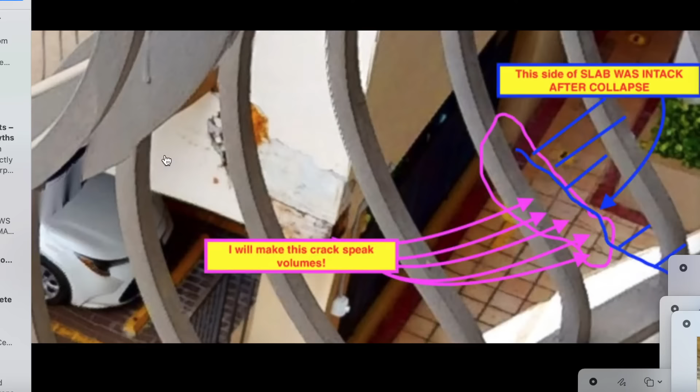So here's my cantilever here also. But this is that box, the planter box. There's the hallway. There's roughly the column. There's the vehicles below. That's the wall system. And right here is that crack.

And after I posted this crack, NIST put out a notification asking everyone to please send in images. You don't know what you have. You might have something in the background. So that was interesting. So NIST is monitoring the channel.

But hopefully they won't get stuck on stupid with the narrative that they must come up with global warming, sea level rise, because the government wants that. It's just a matter of integrity, and these people lack integrity if they just do something like that.

Here's the crack, right? This crack was indicating that there's a deflection over here. So back to my column that I point at in the video I just released. I'll link it below. In the last one, I show you the sagging, the load stresses around the one column there. But now I'm profiling it for you, working my way into showing you how you need to profile the entire cracked up system, including the core samples.

Remember, there's a core sample over here that's fractured. Here's the car, so it's right next to a car, right about there, below, at the deck area. And then right here on the deck is this fracture plane. If I follow this fracture plane, it goes in the critical shear area of the column head, and it comes across right about where we have the core sample.

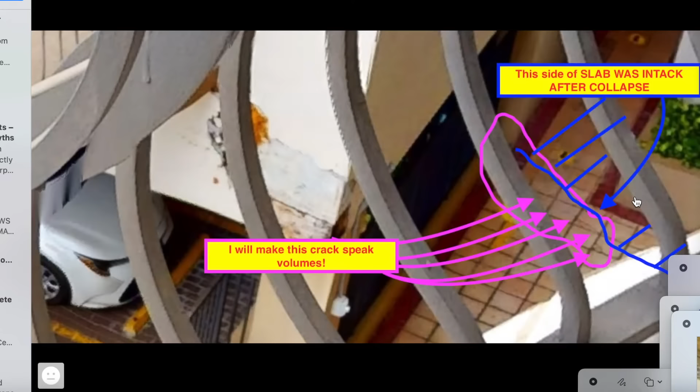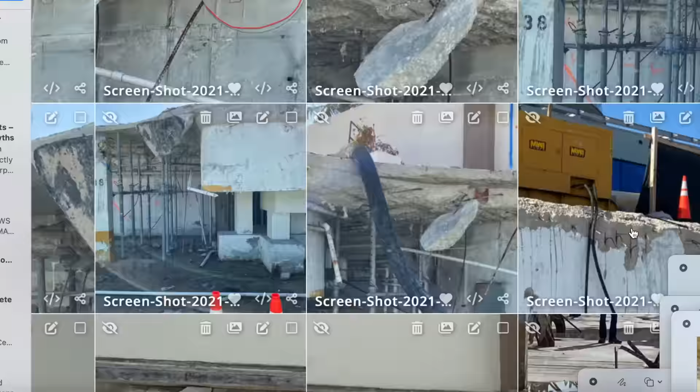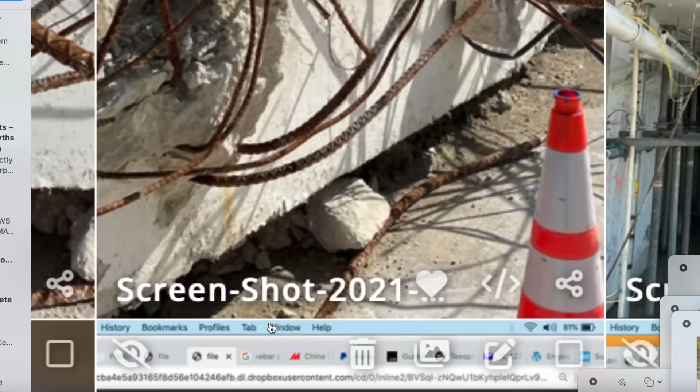This is what I've given you many times, and I would hope that some engineer would catch on. This is the chair. There you go. What's the significance of that chair? There's the wall. Let me give it away now. What's the significance of this rebar here? It's a marriage. With a marriage, do you need one person, or do you need two? There's a big, huge hint I'm giving you there. This rebar is a marriage.

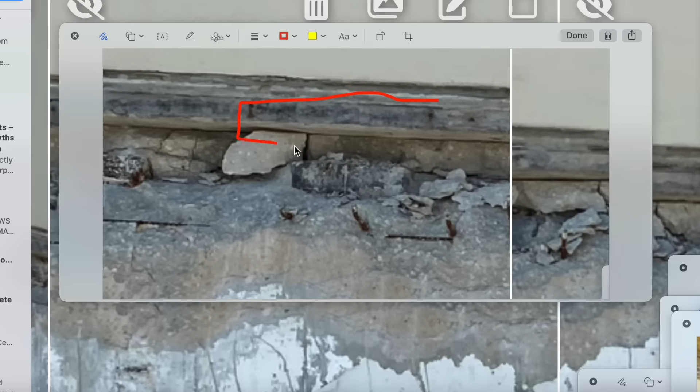All right, I'm giving it away in this video. I talk about anchor, that it's an anchor. I wanted an engineer to say, oh, I see your anchorage there with your system, and now I've got to just do it myself. I'm not proud to do this myself. I hope to get caught, for someone to show that they are actually learning, that they understand.

All right, this is like the slab. Now let's go ahead and put the slab on top of this wall. And then I showed the rebar come up, and I talk about how it bends over, right? It fractures over right here. I show that in videos. And I'll talk about this piece here that's left behind.

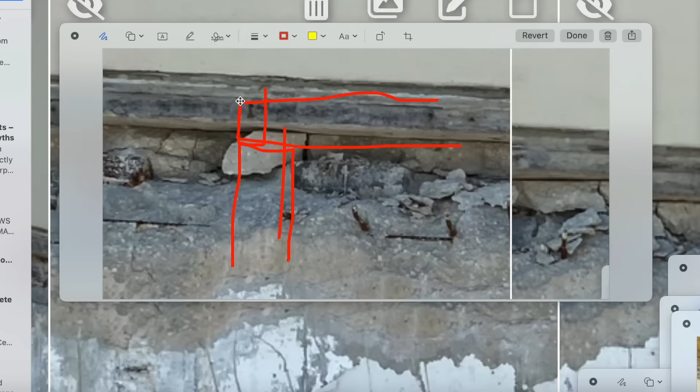Now, how is that piece left behind? How is that even possible? If the rotation is here, that piece comes out with it, doesn't it? Where it fractures and leaves all this piece here, a much larger section of blowout. But we already have the steel here. So how would it do that?

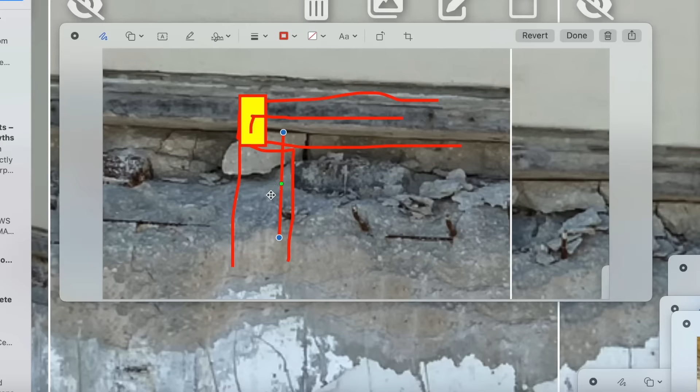Well, if you guys are paying attention, a lot of you are engineers, and a couple of you are structural engineers watching me, so I find it very interesting that no one has called me out on this. And I'm still giving it to you. I do have a photograph. I was going to post this photograph and do this long video.

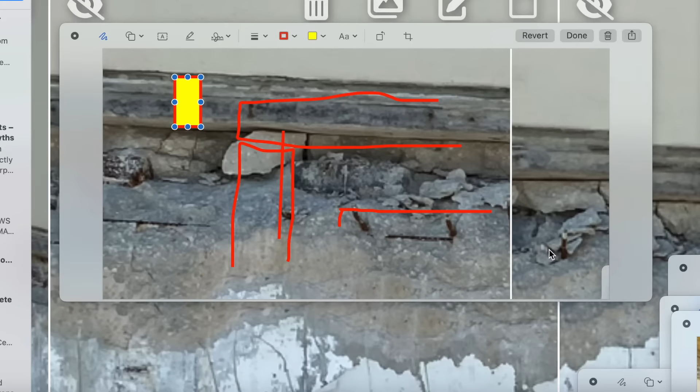Hey, check this out. I drop clues and then I disappear. I was going to drop a clue, disappear, let it soak in, and go back to these videos again, back and forth. I'm giving you a clue right now. Maybe take a week, a month, maybe 2 or 3 months. Maybe I'll never reveal it until 3 years from now, but I'm going to reveal it now.

It's a marriage. In a marriage, you always need yin and yang, the opposites. So this is the front steel that's sticking up. I just said it, so there must be some back steel back here. Let's look. I think I see it right there. Not the back steel, right here. Wait a minute. Is it right there?

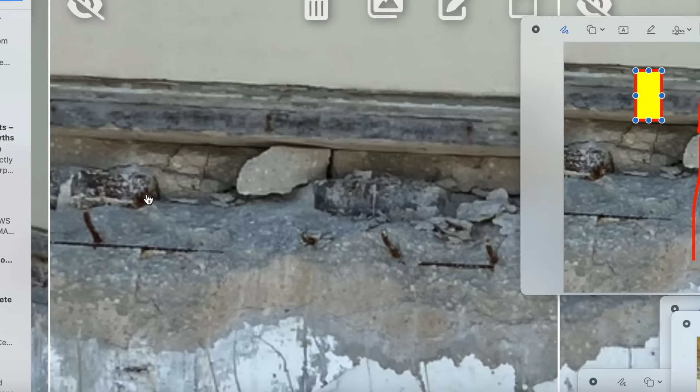Right there? I'm playing around, guys. Here it is. Oh, there it is, right in front of you. Right there, the back steel. There's two steels. All right, let me just cut to the chase there, anticlimactic. There's two pieces of steel.

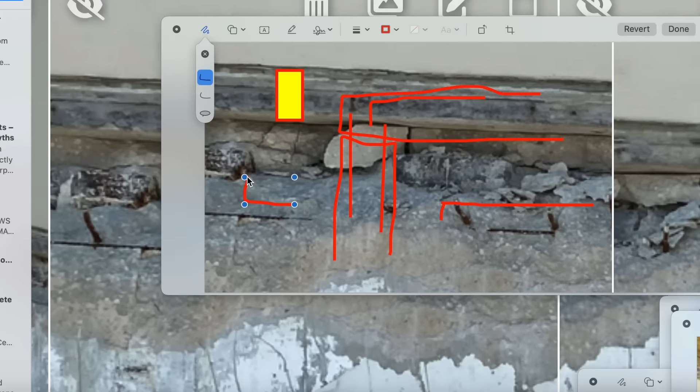All right, so when this rotates down, this is your anchor point here, along with your hooks coming this way. Now, I know you're not supposed to hook. Your hooks on the bottom are really not thought of, but you need development length. This is only 9.5 inches. So they do allow for development length that you can put hooks on the bottom.

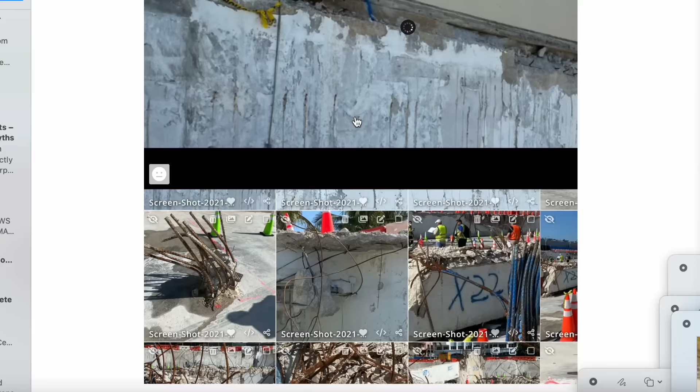Now, somebody might get triggered by that. No, it's development length we're talking about here. L bent rebar 90 degrees as plans call for. You understand that's bottom steel? That's bottom steel with the 90 on it, with the L on it. So it's not top steel.

Top steel's up here. And there's some, I believe, well, was this 90 degree or straight? And you can see the kinks in them right here and here and here. Again, the 90 degrees appear to be bottom steel here. So it appears that this architect and engineer and contractor did development length using 90s at the bottom.

This is biased. I don't really have the full detail of this, but I do know what I'm looking at here. This is rebar at the beam, if you will. Stirrups, bottom steel, and below the bottom steel, as you can see right here, this is not above it. Below the bottom steel, and coming out of the floor over there, is 90 degree bent bottom steel.

So that helps with that reaction at the wall where I show the push-pull, the tugging, the separation, the shearing action. So if NIST is watching this, and apparently you do, you can now give this to your engineers and say, okay, we see something here.

Now, I know wishful thinking is silly of me, silly meaning it's not the way the world works. But I would hope that this would come out, and you could still get your global warming in there somehow, but that you release it. This is how the shear plane actions happen once you get deflection. Again, the testing for punching shear is incorrect.

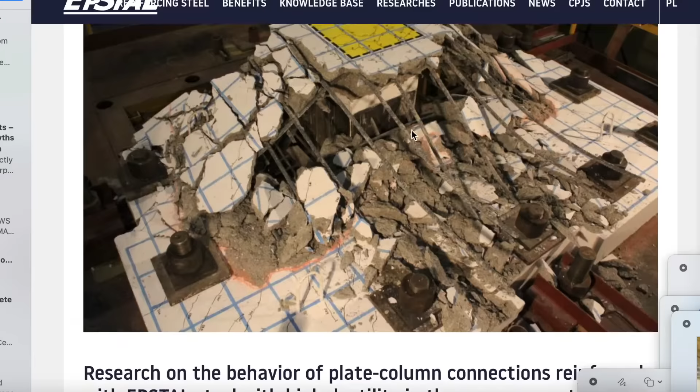The pad's deflection based on load would create... okay. Imagine this is all paper around here, and you start pulling down on one side because it deflects on one side. Why? Because your spans are greater on this side of the paper than that paper. These are your column heads, right? They're close together. Well, in real life, these columns are offset.

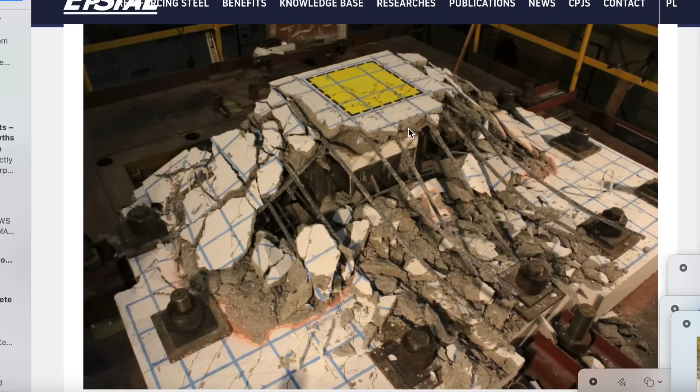And so a greater span is going to have more deflection, being that they didn't beef it up or change the profile of the deck. It's going to deflect more than the shorter spans will. So with that said, the greater spans deflecting more create more of a moment, a stress over on, let's say, this side. Let's see if we have a better image. Okay, screenshot over.

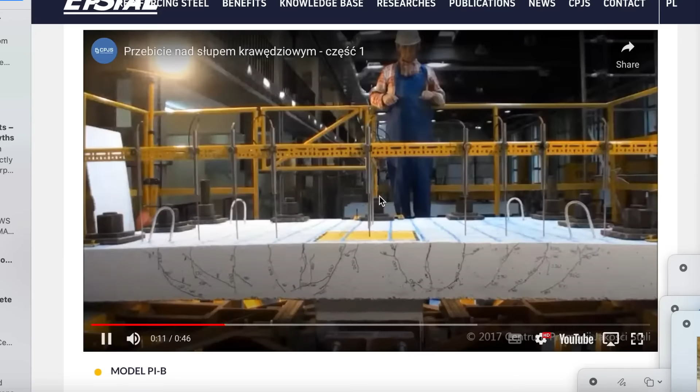Oh, okay. So let's run this one, and it says punching shear test. Okay, so they're pushing up. Okay, so they just pushed up, and there's our first major fracture. Even it wasn't in equilibrium. It kicked this one side up first. It fractured this side first.

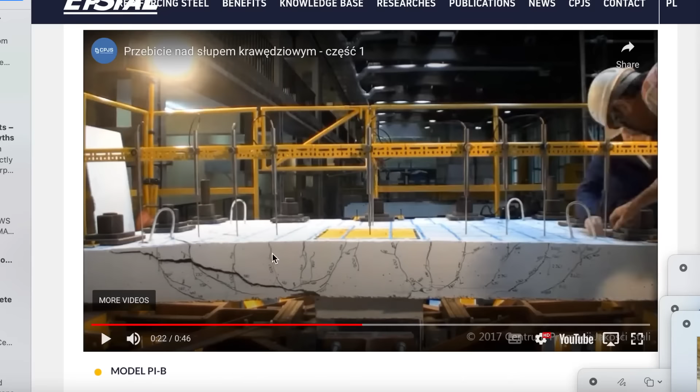And there's just back to its point of anchorage, the part that ties down. But our deck is not doing this. It's not tied there in one section, and these are tied there. There's an actual deflection going on, as I talked to you about. Let's screenshot that and let's show you the deflection. Yes, so engineering is really a bunch of idiots that are teaching this.

Save myself. I'm not that much of an idiot. I'm more of an asshole.

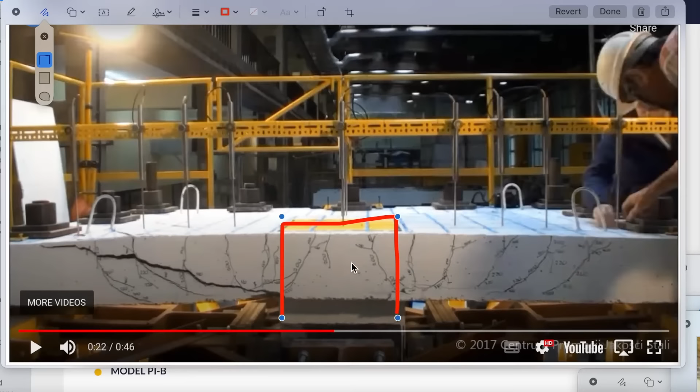So a bunch of idiots teach this, and then it propagates. It gets published, and then they're like, oh, okay, got it. Yep, we can extrapolate from there. But this is wrong. The column is here. All right? Just put the column here. Separate it in your mind. There's the column, and this is the pad above it. All right? And this is the pad.

All right, let me just grab this. Now, there's a true point there and a true point here. In other words, these are this. Let me, if I can do this. I'm just going to use a little, I know it's not lined up perfectly, but let's use perforation like that. All right, if you let me have my little liberty. So there's the pad on top of there, and the transfer from this part of the pad is 1-to-1, directly down, until you get deflection.

If you get a load going this way, because there's another column here. Let's put a column over here, and I only put a partial column that you can see. All right, then let's drag it down. Too ugly. Let's do this. Okay, so now with this profile, this is a 1-to-1 direct. And look what we have here, fracture-wise. Yeah, it's solid. Okay, so it's kind of 1-to-1 direct, except for this angle here and this angle here. They match.

So this fracture, whoa, daddy. This fracture here and this one are symmetrical. Whoops. Are symmetrical. This spacing here and here. Okay, let's go ahead and get rid of one. I'll leave you one. On this side, now let's do what it really would look like. Based on reinforcement, it would probably be the critical shear zone, making that cantilever effect. Remember the planter box. Over here also would be a planter box, if you will, the cantilever, right?

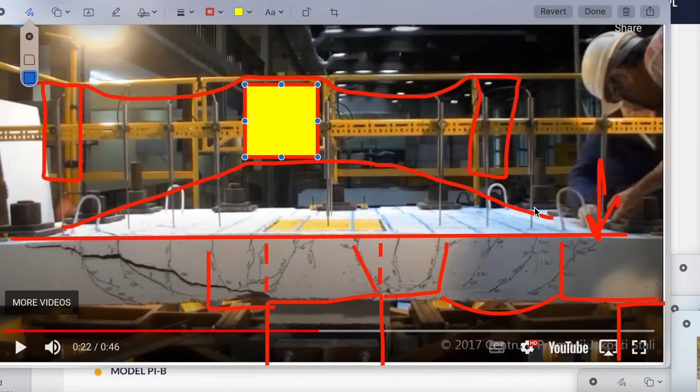The sagging takes place pulling down on the outside critical shear zones here, pulling down on them. And then we get the fractures. The fractures look similar to the planter box, the one I showed you with the car with the fracture above it, by the cars, because the sagging takes place, you get an open fracture right about where this can pick up. Depending on how rigid it's going to be by the column, how much rigidity depends on how much steel they put there.

In this case, we can see the symmetry here. There's this little horseshoe here, this little horseshoe here. Let's see, do we have a secondary fracture in here? No. This is driving up, obviously; the concrete with the steel behaved a little differently over here. I don't know what they're doing there. With that said, it will not balance here. It will start torquing, and let me see.

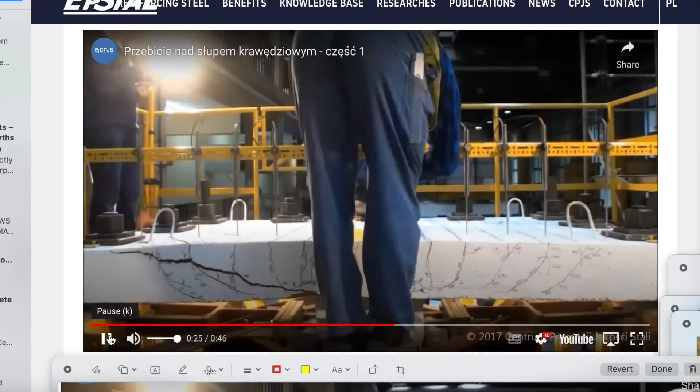So now that it's freed here, this should probably finish breaking and maybe torque and give a different fracture down here. Let's see if they show it. Because it's a different load path. Yes, there it is. So it's a different load path now. Because this is already broke, it's going to fracture. It's still anchored with rebar, but it's going to torque. It's going to put it on an angle now, and as it lifts up, there's a fracture.

Let's do this. One more time. And one more time. Let's YouTube it, because I can second it.

Great. So bear with it. It's very interesting. As long as my mic is working. By YouTube. Wow. Okay.

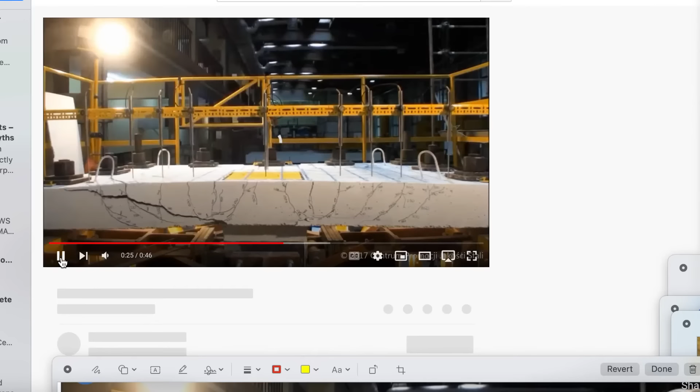Now, yeah, so there's that crown I talked about. Well, that's not the way this thing behaves. This doesn't drive up. It's not the same. They're extrapolating this. Extrapolating incorrectly. And it's not just this engineering group. It's many schools and everything.

They'll put it on top and drive it down. It's still not the same. Deflection is taking place between the two zones. You need to load it between there with some steel beams, perhaps, or like a car, and then put a car there and then load the fucking car up with the tires in place and load it as it will be in real life. Not this.

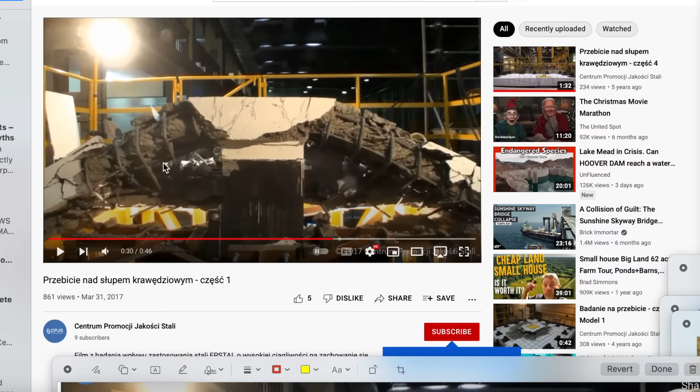I do like that. Wow, wow, this is amazing. Looks like they stirruped it, which is really not going to be something that's going to be seen there. I wish I knew exactly what they consider this model. Let's go back. That's why it stuck together so well. They had stirrups in it. Okay, let's do this.

I'm looking at the fracture develop. How it widens. You see a drop down. Oh, it had a spring to it. See it? It's up. It's down.

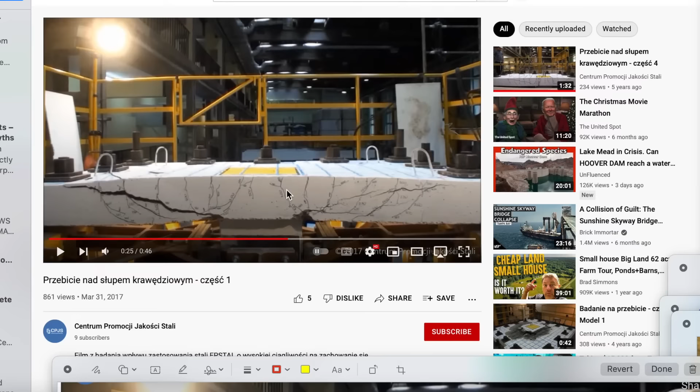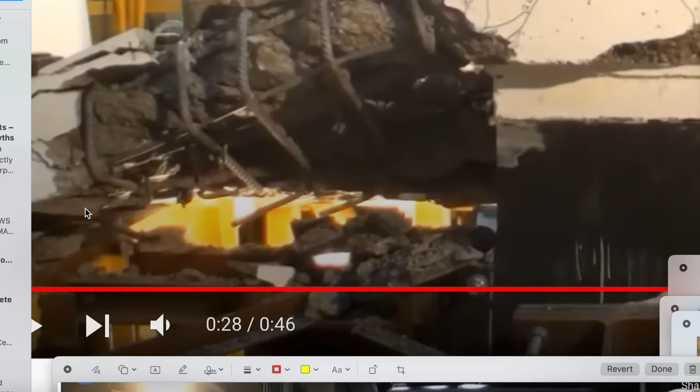So this is useless because you won't be able to see the fractures like this. The way they reinforced it is craziness too. They also secured it, looks like, in the back and 3 other additional points. And they didn't do it here. They just left it open. So, as you saw, there's a torque. One end of it comes up. It's tied in the back. The anchorage back here. There. I guess there's a bolt there.

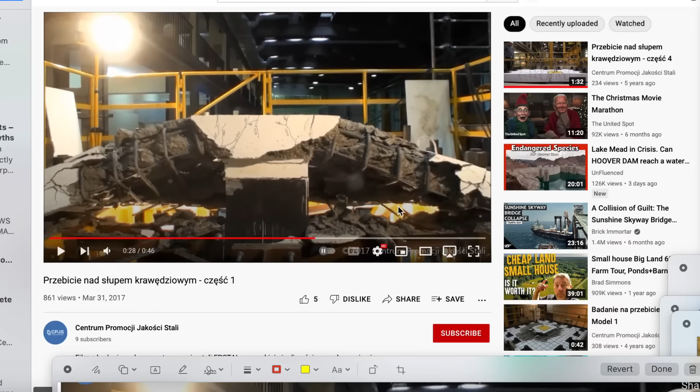So this is stupid. These tests are just stupid. Let's take another look at this one. Another one. Have you guys seen these? Oh my gosh, it's crazy funny. All right, see again, they're driving it up.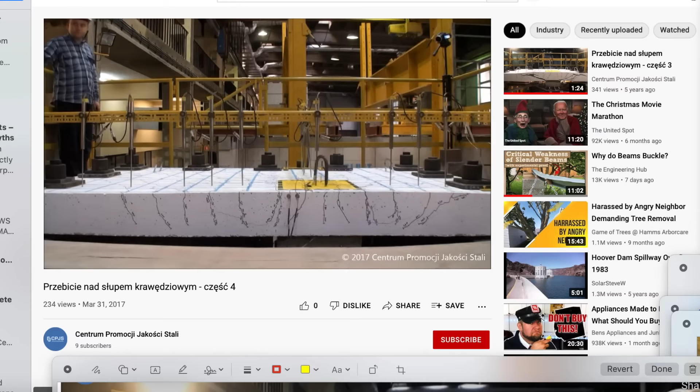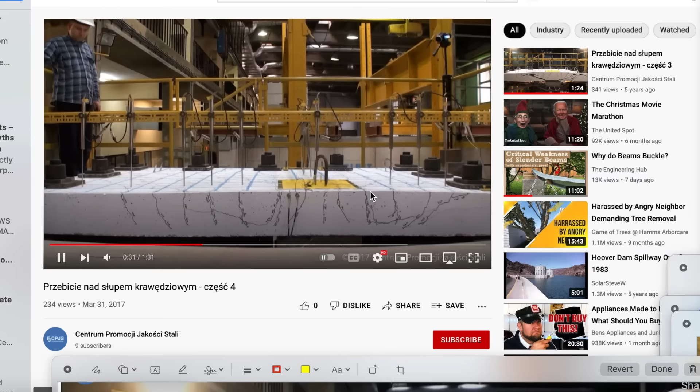Let's watch it. And so there's your securement, and now you're getting this flex this direction. As you see, this isn't flat. There's no choice but to flex. This might have the reinforcement on it also, but you're getting uniform fractures on this face. And these are just crack sensors or load sensors, and it's ridiculous.

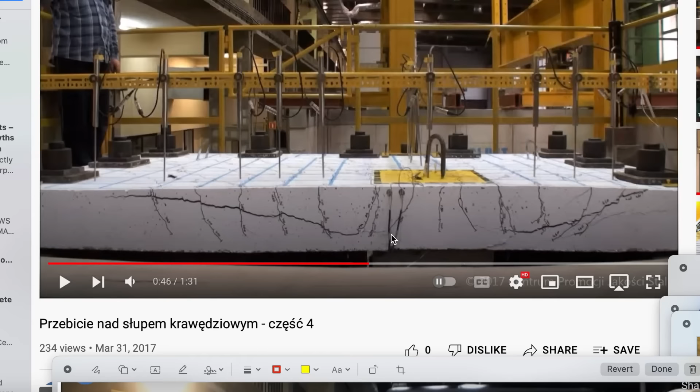Okay, so now as it's driving up, it's separating the bottom half of this pad from the top part of this half in symmetry. See the mustache here, a little mustache there, and there's obviously our column right below it going up. And it's driving, and the steel can't hold on, but the bottom steel is acting like a little bit of a beam action there. But it's fracturing here to here. So it's going to rotate up and away also. And there's up and away from us.

Oh, now they remove the, well, look, I don't know if that's there or not. Yeah, they removed it just to lift it up so they can inspect it, I think. And then just a dead load of it, and trying to hold together with the steel just causes the spalling. Pretty much interesting, but useless. This is not how this fails. There's a steel there, and this is the steel I'm talking about that I would love to see them do, but this is never going to happen. It's never going to happen.

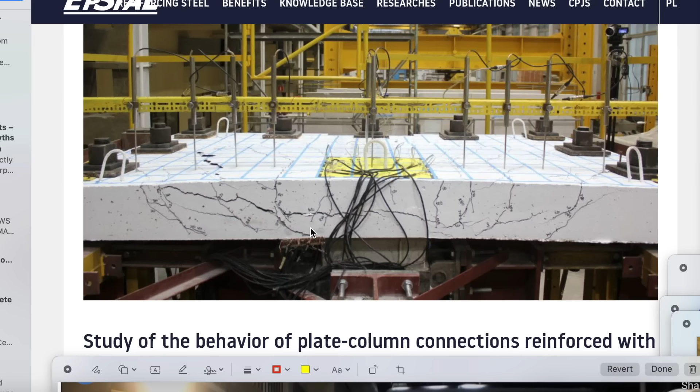Oh, there's their gauges. This will tell the deflection. But they're driving it up. It's not the same. It's not the same.